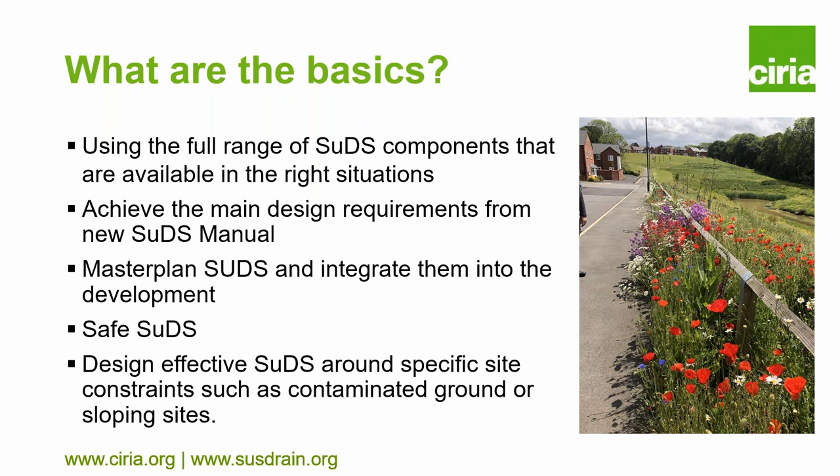And then again, fundamental basic really is multidisciplinary working. So it's vital that drainage engineers work with planners and landscape architects, and the other way around as well. There's no one professional sphere that's more important than another. It's multidisciplinary working, and everybody's contribution is important.

So you can see on both these schemes, the one on the left is in New Zealand. Rain gardens being installed along both sides, the full length of that street as far as the eye can see, and several other similar streets in that area have rain gardens like that. On the right hand side, you can see this is a retrofit scheme we were involved with in Hammersmith, and you can see there on the green area there's a series of SuDS.

There's a swale/basin in the centre of that photograph, and then on the other side of the path to the left hand side there's another basin, but you can see they look completely different. Now as an engineer I can't do that. That's all down to the landscape architects.

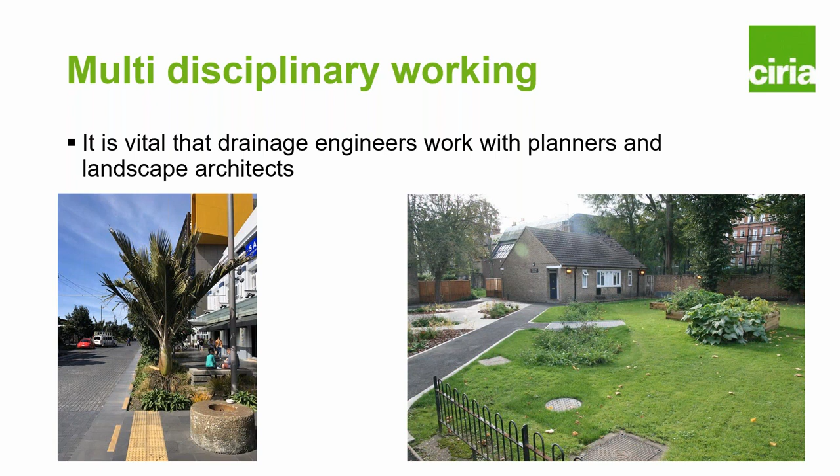The other interesting point about both these schemes, one in England, one in Auckland in New Zealand, if you read all the papers, because there are quite a lot of papers published about that one in Auckland, they have exactly the same constraints that we have in this country. Nothing different really, but they've managed to put some really good SuDS in there. Next slide.

So yeah, another basic, you need to be open-minded about the design. Fundamentally, what we're doing with SuDS, if we want them to be truly multifunctional and achieve all the requirements in the SuDS manual, is that we want to aim for landscape systems at the surface, and they should achieve a range of functions. That is the ideal, and that's what we should be aiming for, and that's where you should start.

But sometimes, because of the constraints on a site, you will end up using more engineered systems, and you might end up using underground storage, such as that in the bottom picture. So don't discount underground storage, because sometimes it can help you achieve what you want to achieve in terms of landscaping and multifunctionality. And on a lot of sites, a combination of solutions is appropriate.

But what you shouldn't do is start at the bottom and design things as pipes and underground systems, and then put something like a pond or a basin at the end of it. Yeah, the underground systems really should be a last resort if you can't achieve the surface or near surface systems. Next slide.

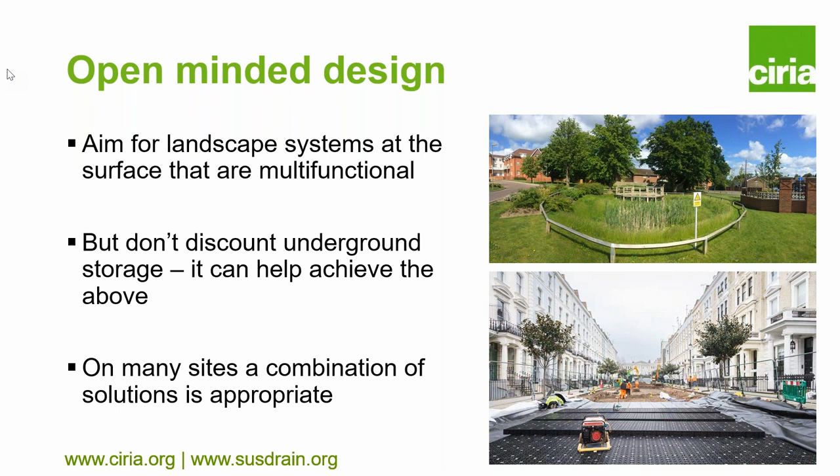So this is the basis of the design requirements in the SuDS manual, and it's referred to as the 4 pillars of SuDS. So you can see there on the right hand side, that's a diagram from the SuDS manual. So I've got a list on the left hand side. Whenever we see this, and even on that diagram, if you read that diagram in the normal way that you read things, quantity comes first, then you move across to quality, then you go down across to amenity, and biodiversity comes last. So I think a real problem is that we always list them in that order.

So in my list, I've put incorporating amenity and biodiversity at the top. Source control, so controlling runoff as close as possible to where it hits the ground. So using swales around the outside of a car park, or basins that are really close, or rain gardens, green roofs, permeable pavements, really, really important. Allied to source control is the provision of interception. So you're preventing runoff for the majority of rainfall events, up to around about 5 millimetres.

We're managing pollution, because runoff from paved surfaces that are trafficked is polluted. And we want to control runoff volumes as well as rates. So we talk to a lot of people even now and ask them about SuDS design, what do you have to do? And the first thing they'll say is you design it so that you control the runoff to a greenfield runoff rate. As you can see, that's nearly at the bottom of my list, and it's only one of many other things that good SuDS design includes. And then finally, you've got to look at exceedance. As you would for any drainage system, you need to consider exceedance design.

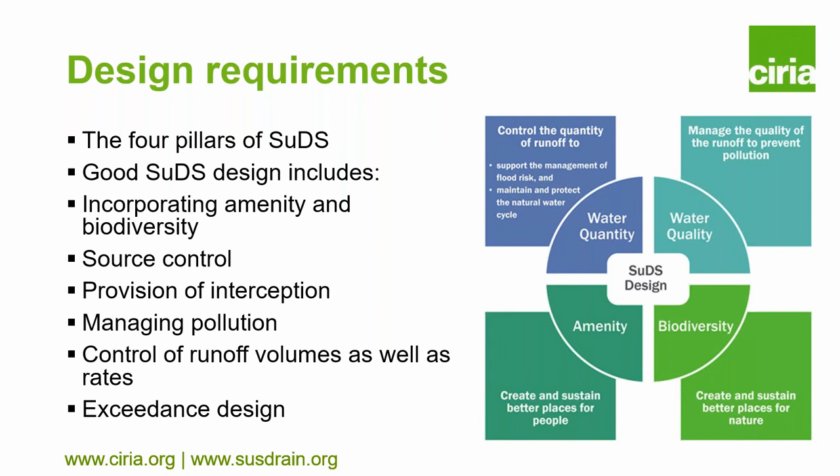Going back to master planning, absolutely vital again. Can't understate that point. So the first process in master planning is to understand the natural drainage patterns. And as part of the training we've been delivering to water companies recently, we've been explaining this process to them, and certainly I think they will be looking for this as part of the adoption process going forward. So it is going to become more prominent. But you can see on the right hand side, we explained this in the CIRIA training.

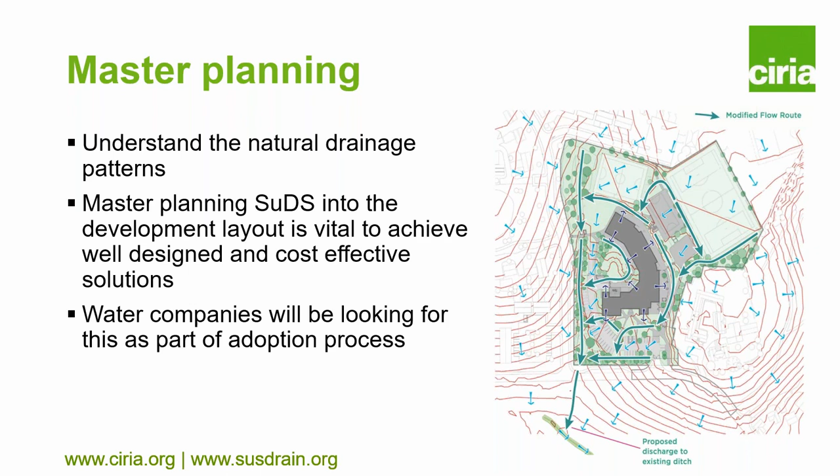It looks simple. You just put in arrows, which way will water flow on a contour map of the site, and then look at how the building interrupts those flows, which will then guide you to where you're going to put your SuDS. So that modified flow route within the development. But it's a really, really important part to get successful SuDS.

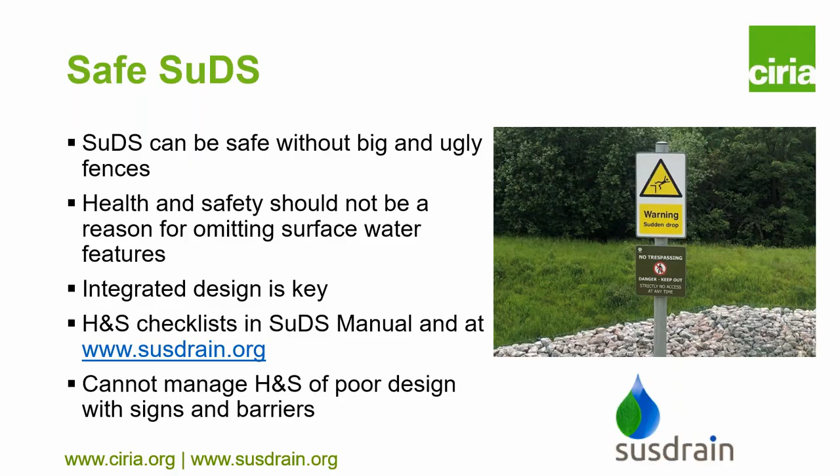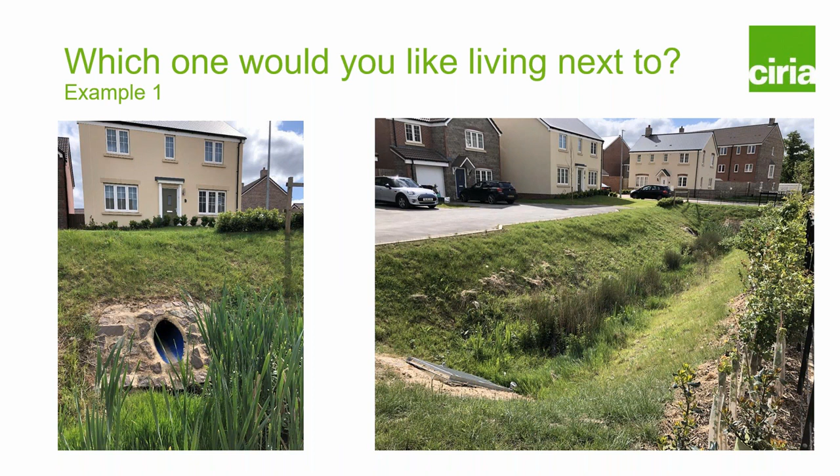Okay, so mercifully and sensibly, it looks like most people are wanting to live in example 2. So that is great. Right. Okay, so if we just go to the last slide, a quick summary.

So, getting basics right. If you get the basics right, what you will end up with is good quality schemes. You'll achieve all the objectives in the SuDS manual, and in Wales, it's even more important because there are legal requirements in terms of the national standards that you'll achieve. The SuDS will be valued by the residents and users. You can reduce costs in many cases.

You provide systems with integrated safety. For developers, there's probably going to be less risk of delays during planning, getting approval, and you end up with robust schemes hydraulically from a pollution point of view. And I'll just leave you with a video of water flows in a retrofit scheme that we've done in London recently.

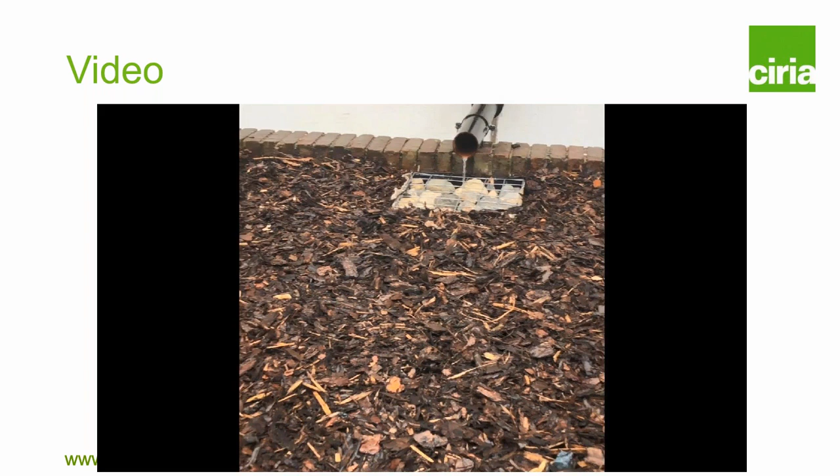So it's a bit jerky on my screen, probably because it's a big video. I think you can see there that if you've got well-designed SuDS, essentially, you can see there's water coming down the downpipes, but it's dispersed into that swale, for example, and you don't actually see any. The water flow in the bottom of the swale is so low that it's just hiding in the grass, basically. Right. You can stop that now. Well, enough.

Great, well, thank you for that. And we've got time for another poll, really. This is asking about what do you use most often for guidance? So if we can run that poll, that would be great. Okay, marvelous. So most of you have voted. So 76% of you have used the SuDS manual, so that's great. And it looks like 10% use susdrain.

So susdrain is being added to all the time with new case studies. So at the moment, you will see some of the case studies that we got from a recent awards nomination. So on susdrain, whether it be on case studies or the awards, we've probably got about 100 case studies to look at. So we've got quite a good resource. So thank you for that presentation, Steve, and also thank you for the vote.

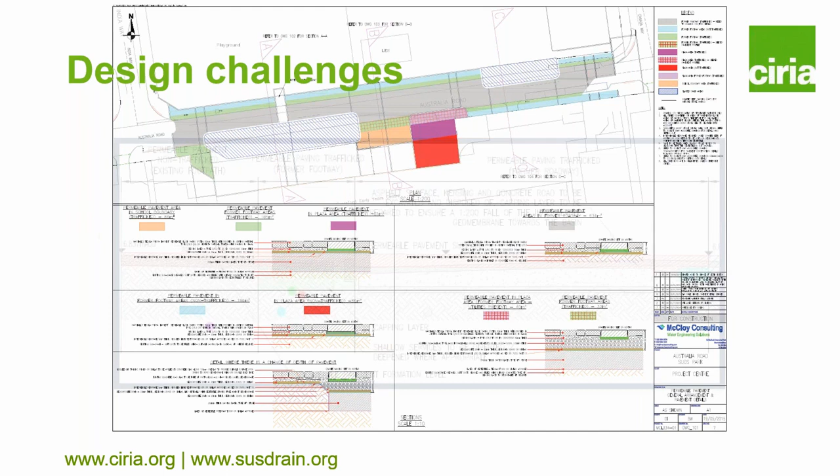So you can see in the cross section there, there's a lot of things in the start of a project that are fixed. We have fixed levels at the perimeters of the site. We're not going to start to build up by 400 or 500 millimeters. So we have to work with those levels, and we have to ensure that as we collect that water and move it through the site, we're cleansing it, we're conveying it, but we're conveying it at a shallow level.

So if we want to realize the potential of water at the surface, by the time it actually reaches a basin or a rain garden or bioretention area, it's still traveling at a point where, as Steve's slides are showing, it's not significantly below ground level. So in this example here, we're literally about 100 mil conveyance of water below the ground. It's not going much deeper than that. So by the time we actually get to the basin, we're coming in at a very shallow level.

Paul, next slide, please.

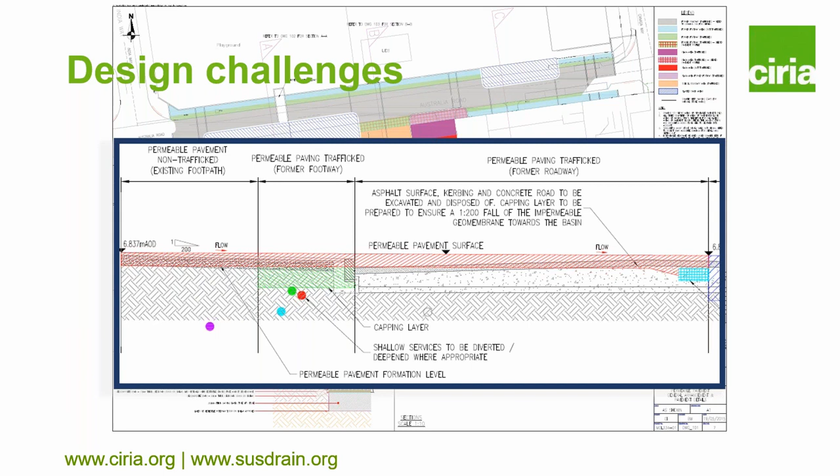The one thing that we really need to do as an industry, and I suppose there are a number of people online today, and it's something to take away and have a proper think about, is some of the conventions we've adopted over the years in the industry. There's many rules, and I put that in inverted commas. This isn't a classroom, but if you put the inverted commas around those rules, because really what they are is they're meant as guidance and screening in terms of things we should be thinking about and taking further consideration whenever we're in proximity.

So to give you a couple of examples, a 5 meter offset from building for infiltration has widely been stated as, you know, you shouldn't infiltrate within 5 meters, but really that was only ever intended as a guide to think about it more carefully. And other things like the minimum flow control setting of 5 liters a second, we still see commonly cited by engineering reports. Again, it's not the question we ask. We start by asking how do we protect that opening from blockage, not how low that flow rate should be.

So the understanding here is that this thinking came from a different time. It was a different context. We're thinking about conventional drainage, where there was a different set of parameters where we were concentrating flows and conveying underground without any real protection or blocking of debris and litter getting into our systems.

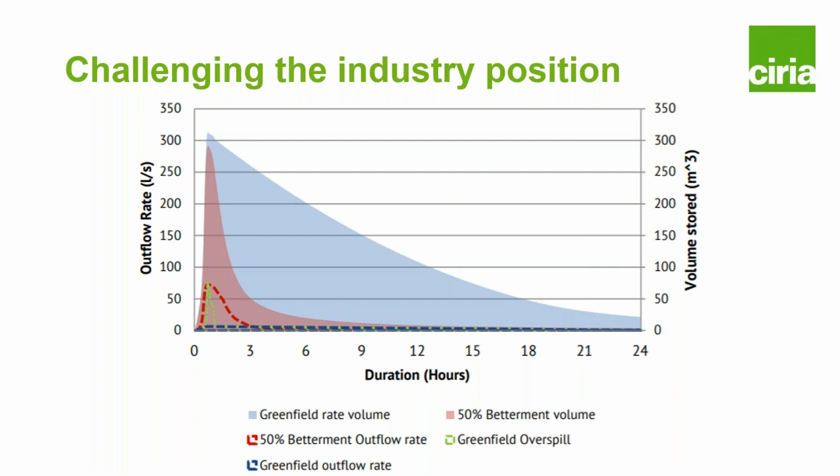So it's disconnection of the combined sewer. Stormwater that once went to be treated at the treatment works is now slowly passing through the system and eventually ending up in the River Don. So instead of travelling a number of miles to the wastewater treatment works, it's travelling to the bottom of the hill and then going 100 metres into the river at a controlled rate.

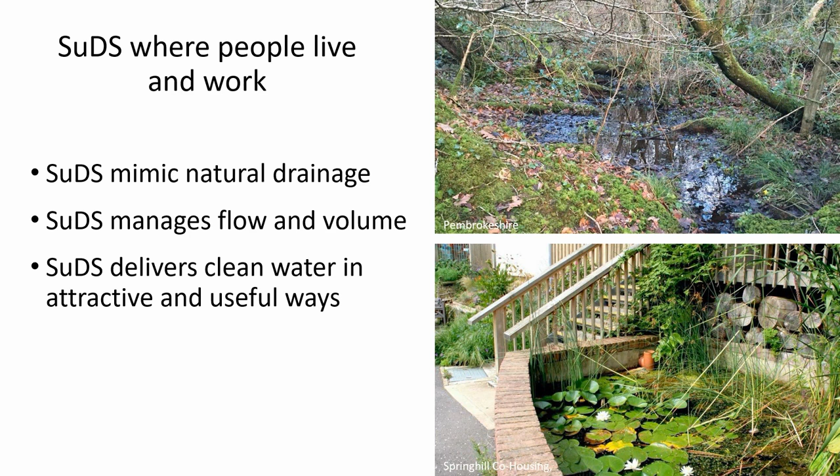So these are, again, pictures of the scheme in Stroud. And there, again, is where people live and work. Now, the thing we found and learned very early on is that you can't do SuDS if you don't change some of your practices. And one of the issues at the moment is that the drainage of housing people have not changed how they approach the problem. So what you generally see is gullies, pipes under the ground, and a sodding great hole at the end, which we call a SuDS basin, which is usually far too deep to use effectively by people, and is carrying polluted water into something which should be pristine. That is, if it's used for wildlife or people, it should be clean water.

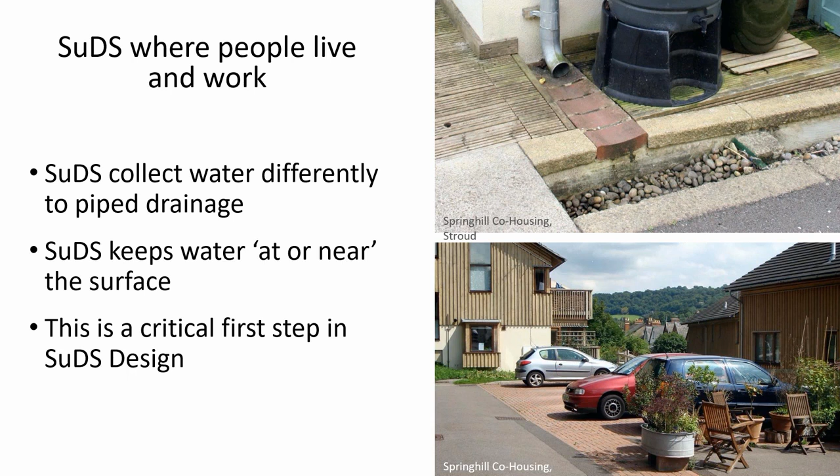And the conveyance at the bottom, this is Stroud again. Here's a rill running in front of people's houses, which carries most of the water most of the time. The big volumes, however, are diverted into a green space. That is the play space I was referring to earlier. So we're splitting these areas up into different spaces.

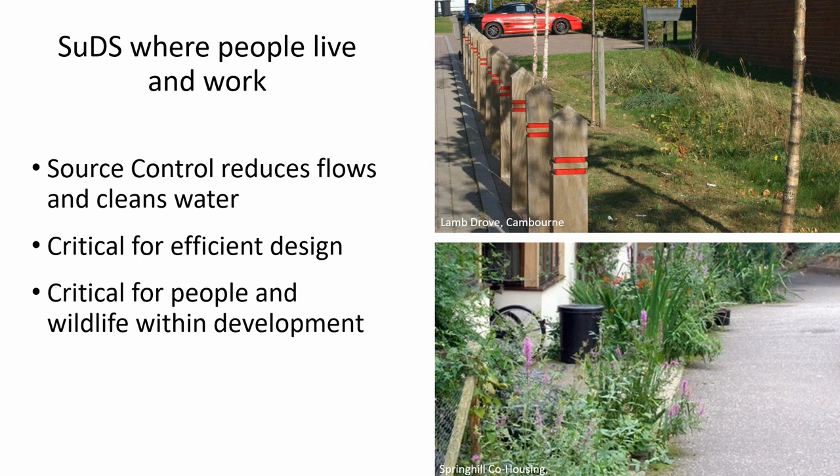I suppose the term that followed after, in a sense, is this idea of subcatchments. So all of these sites have been split up into subcatchments, so we've got a very efficient use of the space that we have available. So, right, Paul, next one, please.

And on the top right here again, 35 units per hectare. This is a swale that runs around the site, carrying the larger volumes of water. But although this is each a part of these swales, and there's a basin which we'll see in a minute, they've all got flow control. So there's multiple flow controls.

There are different subcatchments holding all of those various volumes of water, and at each place the critical volume, that is stuff from the car park or from roads, is cleaned before this water goes into these surface features. So there's a hierarchy of collecting, cleaning and storing in these subcatchments right the way through the design, which means that you're using these sites so much more efficiently.

And then at the bottom, we're going to a very, very dense site up to Stamford. This is a site which is 2004, thereabouts. And the reason I'm using these older sites here, and we're doing a new one, for instance, for co-housing, using the same principles, but we haven't got the evidence. This is all evidence that these things work, that they work over time.

And most of the time here, again, permeable pavement in these high density sites, most of the storage here is within the structure of the development. So little bits of water that aren't catered for by the permeable pavement, we can have small features which add amenity to the site. The people here are hardly aware of this being a drainage system.

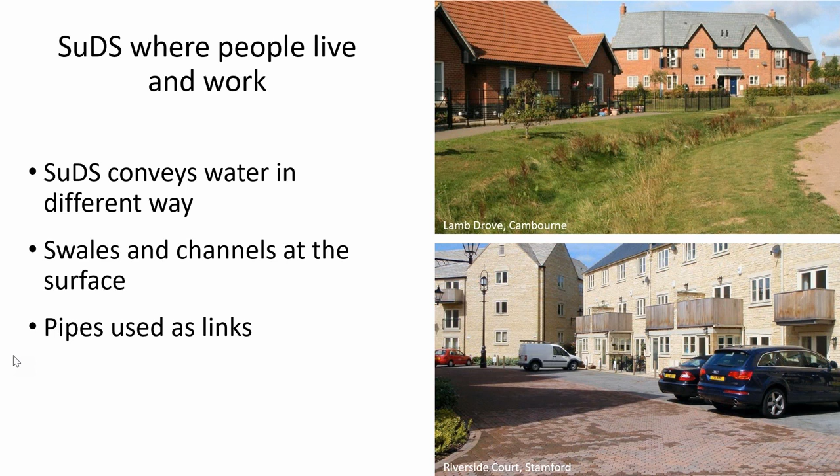And there's again at the top, that's the 106 units per hectare. A lot of these features that you're seeing here are not SuDS. These are part of the scheme. At Stamford, we specifically were asked to create some interest within a very dense scheme, basically so that they could sell the houses. So we suggested a series of shallow canals, which the developer was very happy to do.

But most of the work is done in the permeable pavement. There's no additional space required for SuDS here. We have used those spaces which are available to us. So all of the pavements are doing work. These features which the developer wanted as visual interest in the site, they are the conveyance for all of that water before it drops into the River Welland. So again, another myth which has grown up is that somehow SuDS is expensive.

All of these features are either part of site development, the quality of the site that we're trying to design, or they're integrated into the structure of it, whether it be pavement or open space. And so at the bottom here, this amenity space on the Flows project at Lamb Drove in Cambridgeshire, that space was available. It was an amenity space which was designated by the council, that space had to be there.